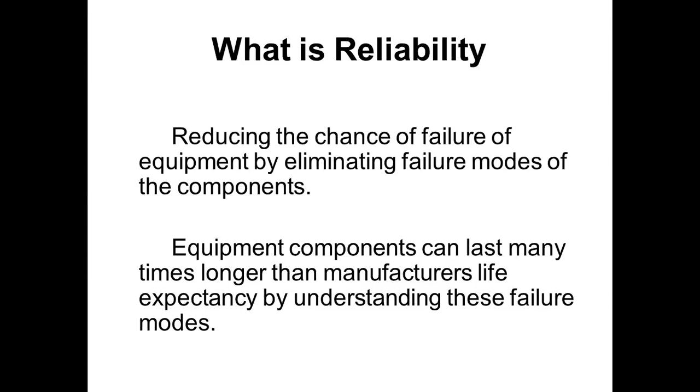So what's reliability? Reliability is reducing the chance of a failure of equipment by eliminating failure modes of the components. Now, a lot of times when I walk through plants and I see motors in a maintenance shop, or I see a gearbox there, and I ask why those components failed, they'll get answers like, well, it locked up, or the gear stripped out, or the bearings failed in the gearbox. But we have to know exactly what component failed in that piece of equipment to understand how the equipment actually failed, and then from that information, we can keep those components lasting longer and extend the life of those pieces of equipment. So why is reliability important?

If you're talking about reliability issues, whether you're a vendor, whether you're an operating plant, whether you're in operations, equipment reliability ensures that the equipment will last many more life cycles longer, and it reduces the cost of ownership and the life cycle cost of maintenance. We'll talk a little bit about life cycle cost as we go through this presentation, because it's important to understand the life cycle of your equipment and how, as reliability engineers or operations people, we need to extend that life cycle.

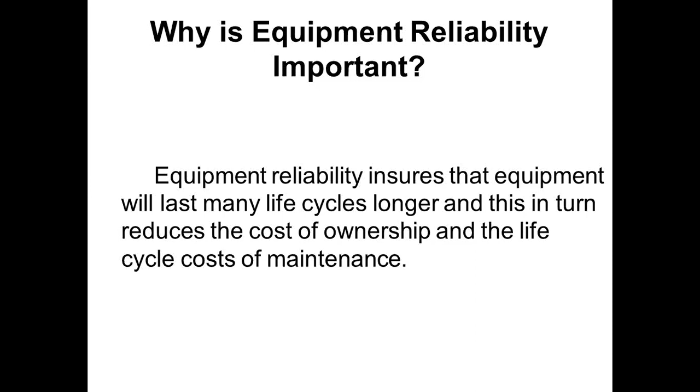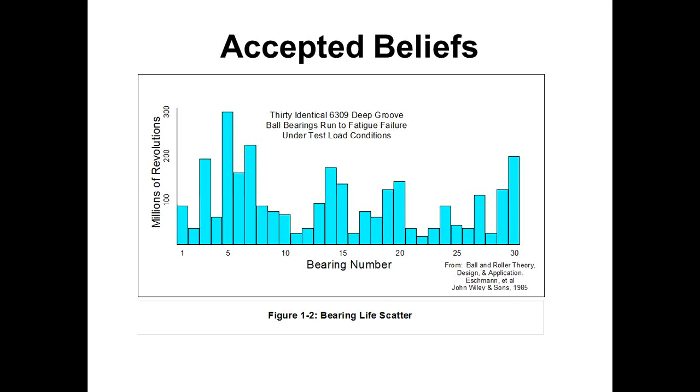Now, fortunately, there's a company in New Zealand that's redoing this study in modern days here, and they're going to do 90 bearings over 3 years, so we'll have some different data here in a few years. But if we accept this as an accepted practice, we're not going to have very good reliability at your plant. So it's important to understand that equipment and components can last and function many more life cycles. A lot of people believe - and I go into plants all the time where they change motors out based on mean time between failure, change out belts and bearings based on mean time between failure - because they assume that's all the longer it can last. But there's many things we can do to make those components last longer life cycles.

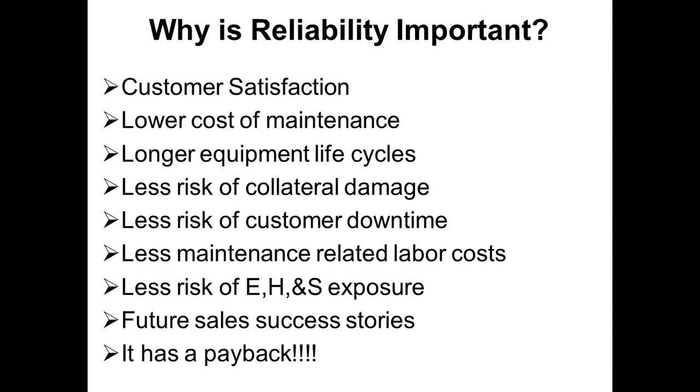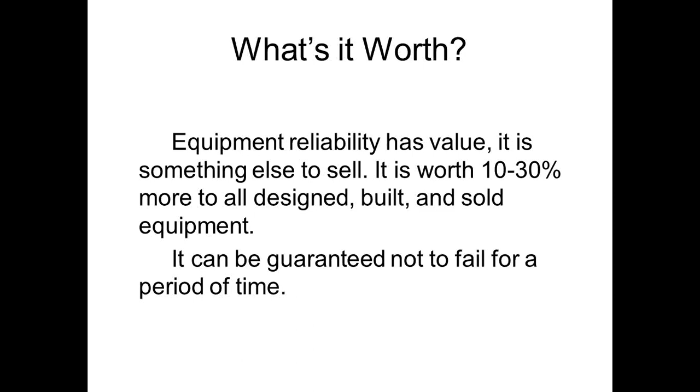So if you're a vendor telling your customers, or if you're an installer - and I did this kind of work for a few years where I'd go in and install pumps, fans, and rotating equipment for companies - I would guarantee no failures for 3 years. Now, how can you do that? We're going to look at some methods here in the next few slides where I can make those guarantees. I've never had to pay off one of my guarantees for the 3-year failures because we do things right up front.

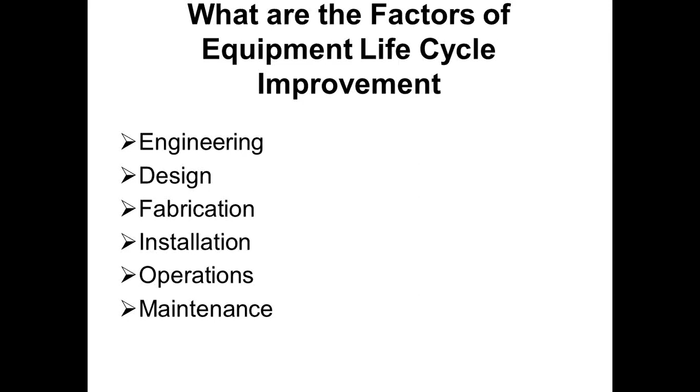So what are the factors that go into equipment life cycle improvement? We have engineering, the design step, fabrication, the installation step where we're putting our equipment in, then operations who operate the equipment, and maintenance who maintains the equipment. So what are the factors? These are all the factors that improve our equipment life cycles, but these are also all the factors that cause our equipment components to fail.

The reason their motors last longer is because the balance standard is much better on the rotor. They balance their rotors to 0.05 inches per second, where all your other motor manufacturers balance to an EASA or ANSI range of 0.08 to 0.12. But many of the motors I check out of the box in new equipment are much worse than that balance standard. I've checked brand new motors from Reliance out of the box that were 0.28 in balance. Well, those motors are only going to last about a year when that happens. But a lot of times we don't check new equipment for balance because we assume it's new.

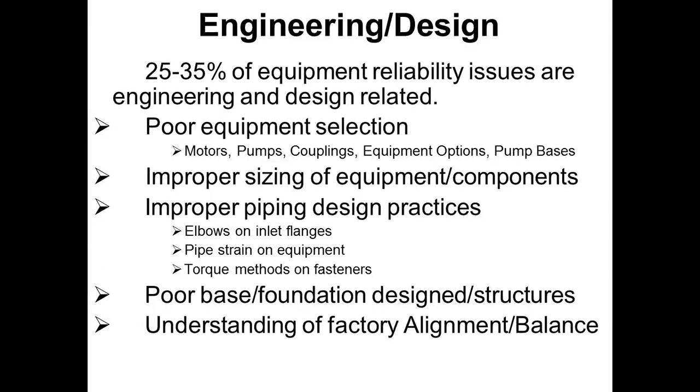Improper sizing of equipment components, improper design practices with pipe stressing, torque methods on fasteners not being proper, poor or improper base foundation - the structures we put our equipment on. Not understanding factory alignment - I was installing equipment for a company, and I asked about the alignment procedure after the equipment was installed, and they said, oh, we align all the equipment at the factory. Well, it's not aligned and balanced when you get it in the facility.

And then finding out who makes the best motor, who makes the best pump, who makes the cleanest lubricants we're going to put in our equipment, and all these other components. I just listed a few here for different industries - who makes the best of those? And then the question is, when you know who makes the best, do you put the best equipment on everything? And the answer is no. The answer is you put those best components, those best motors, pumps, and couplings on your equipment that has the highest criticality. And once you start correcting the issues with that equipment, your failures and your downtime are going to be reduced.

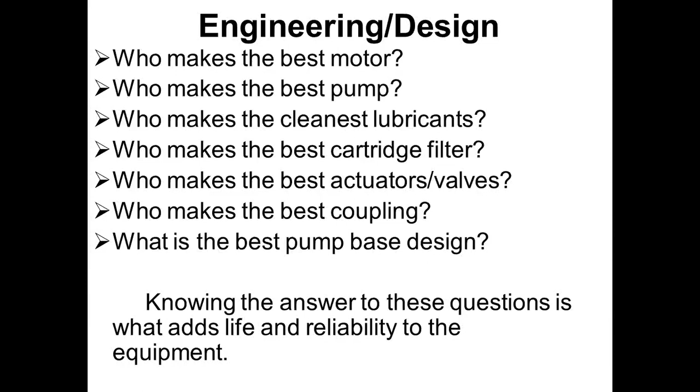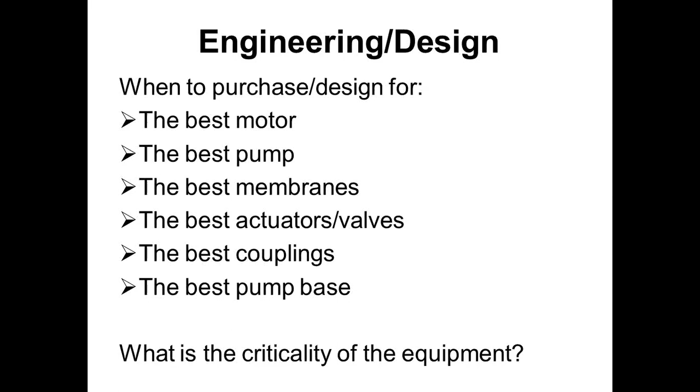So when do you purchase for the best motor? You purchase it for your high criticality equipment. And that's another webinar we'll do later on in the year, on equipment criticality.

Here's an example of equipment criticality. Take this 1972 Ford pickup, it's got these components: wipers, headlights, brakes, tires, seat belts, and a fuel pump. What's the most critical component on that Ford pickup truck?

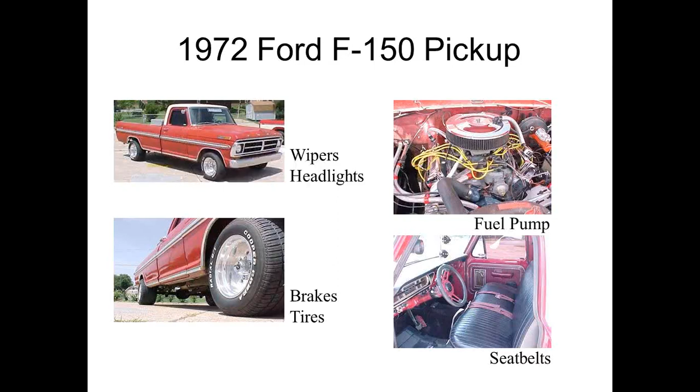You can go down through, and if I ask 10 different people, they'll give different answers. Somebody will say maybe the tires are the most critical component. Some say the fuel pump, because without it we can't operate. But if you're from a safety background, maybe you say it's the seat belt—we can't operate the truck if the seat belt's ineffective. We've got to have brakes.

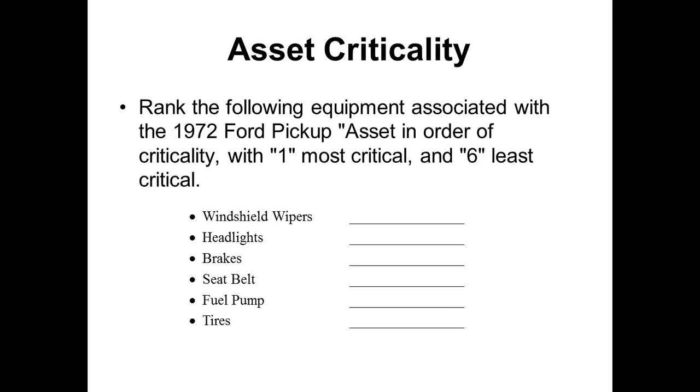But it's dependent on how you use the equipment as to which of these components is the most critical. If you're in an area where it never rains, like El Centro, California, where they say it rains one day a year, you may not need windshield wipers. If you never drive the truck at night, you may not need headlights. Again, it's dependent on the application, but it's about having a process to determine what components in your plant are the most critical. Once we find out, we put the best equipment on those critical components.

These are all the people that participate in an asset criticality assessment: your safety, environmental, commercial, operations, and maintenance people all have to have input into criticality. When you do criticality, it can't just be a maintenance team determining what equipment or equipment components are critical.

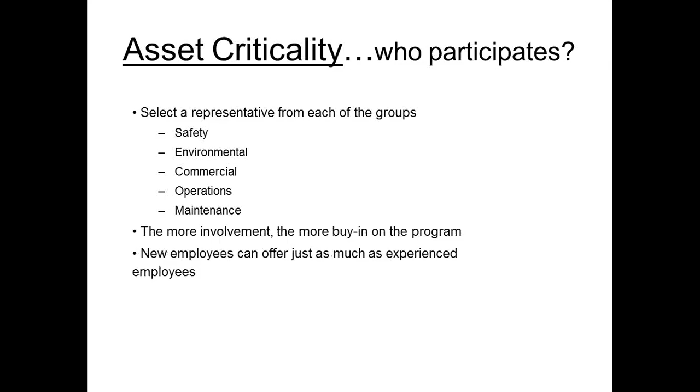Here's an example of my asset criticality database where you ask the questions. As you go along, you can see this overall score as we ask questions in areas of safety, environmental, sometimes food safety, quality, and operations. The database keeps track of where we're at on the scoring and gives us an overall total. From that total, we can determine what equipment in our plants is the most critical.

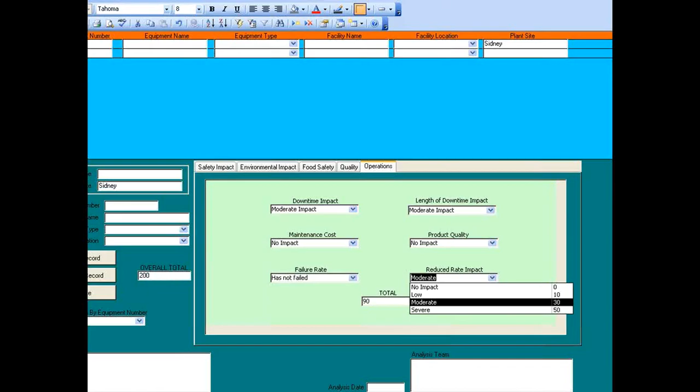Now, considerations for design. How do you design things? Do we want to make everything last for 30 years? Who's the customer? How critical is the customer? How critical is our operation? How much safety is involved? Are you maintaining the equipment yourself? So you start asking these questions.

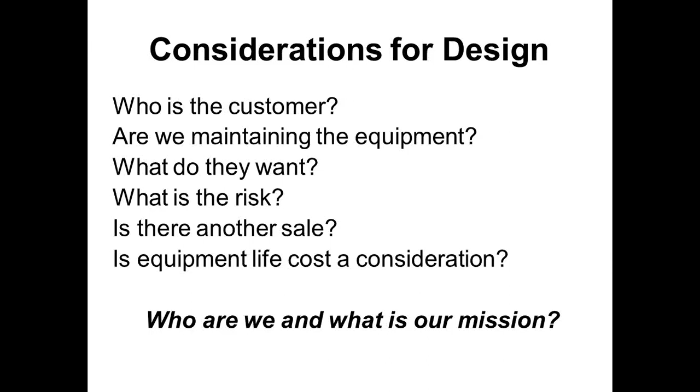How important is it to engineer and design for long life? Is equipment life cost a consideration? Is downtime a consideration? So a lot of factors go into this.

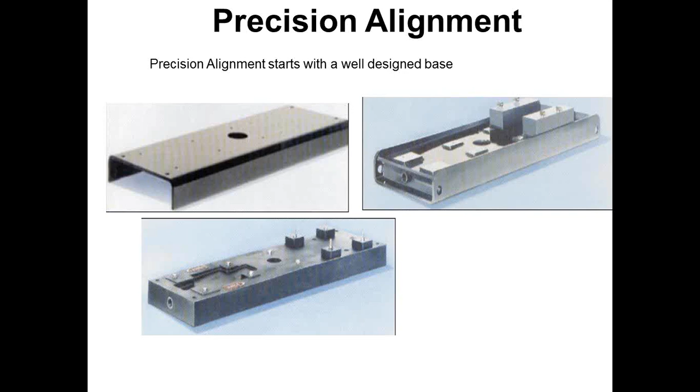Here's something people don't consider when buying a pump: what's the shaft deflection going to be if somebody slams the discharge valve shut? Here's a calculation called the L3D4, known by most pump manufacturers, but they never bring it up for one reason—they like to sell pumps and pump parts. Your L3D4 should never be over 50.

So here's an example from the pump we just looked at. From the impeller to the bearing is 7 inches—we take that to the third power. The shaft diameter is 1 7/8 inches. So we have an L3D4 ratio of 27.8, a well-designed pump.

Now, if we cut the shaft down to put a shaft sleeve on, cutting it to 1.5 inches for the shaft sleeve, our L3D4 goes to 68.6, and it's not a very reliable pump. That shaft's going to bend sometimes on startup, sometimes when people close discharge valves too quickly. So again, just a quick review of different things to look at in design and engineering.

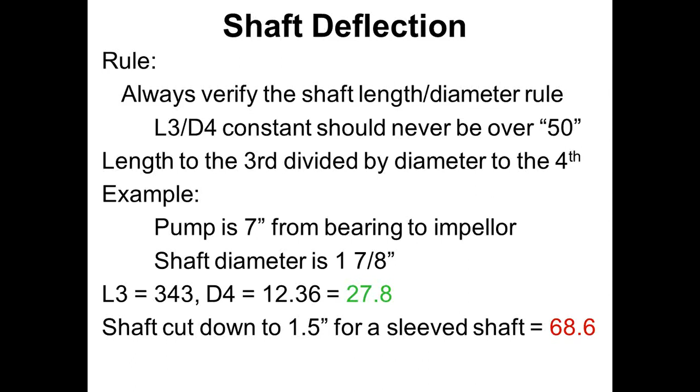So when do we want to use the best? We talked about that—look at your life cycle cost. If you're selling equipment, can you sell on life cycle cost? I put a couple of slides in here.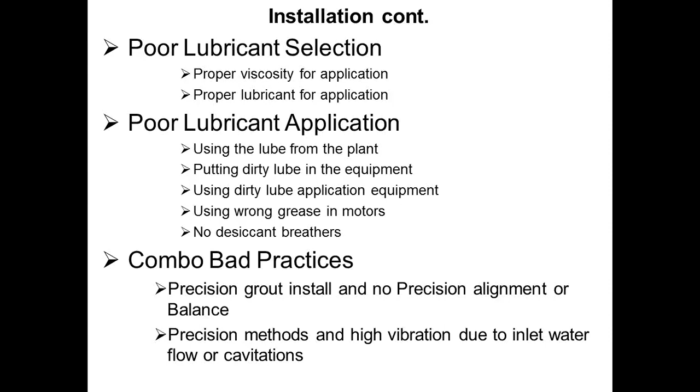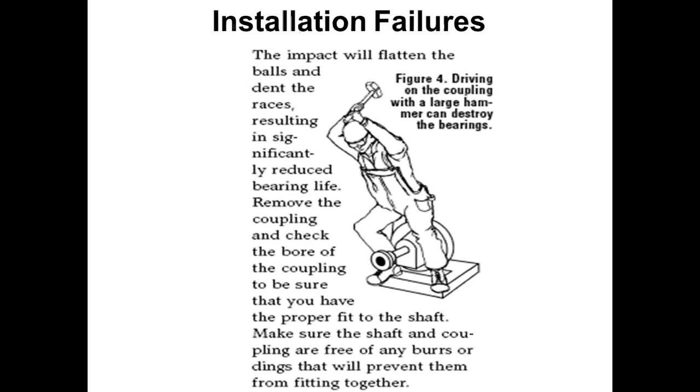So if you're going to use good structures like that, make sure you use precision alignment, make sure you purchase balanced components. And then how many of your failures come from your installation practices, from maintenance people putting couplings on, the way they install bearings, the way you store bearings? So a lot of installation failures.

Now we get down to the equipment here, and we've got operations that are operating the equipment. Well, if we don't operate it correctly, what kind of bad things can you do in operation? 10 to 20% of your failures from your equipment are from operations.

Starting equipment under a full load. If you close the discharge valve too quickly on a centrifugal pump, you can bend the shaft. Your maintenance people or your operations people are not trained to go out and touch the equipment and monitor thermal conditions and catch things at an early stage.

Your operations people are not trained to go out and touch the equipment to find out if you have physical vibration, and not monitoring your visual oil checks. I train operators in some Owens Corning plants to look at the oil and tell if the oil is oxidized, so you can report that back to maintenance. Sometimes we can tell if there's moisture in the oil just by a visual check.

Operating equipment in manual. Lack of fluid to the pump on startup and destroying seals. All things a lot of times that are happening from operations.

I put this one here, water on components. I went to a plant one morning that I was doing some work at, and the motor was kicking out the night before in the thermals, and so the operator thought it would be a good idea to put a water hose on the electric motor. Well, that's not a good practice, but again, they're not trained. It's probably been a common practice at that plant.

Lack of a TPM program. Total productive maintenance is where we get operators involved in not just the maintenance of our equipment, but doing proper inspections. One of the things I'm doing with Owens Corning right now is we're doing operator training on equipment failure mode, so the operators can recognize different things that happen on their equipment that cause it to fail.

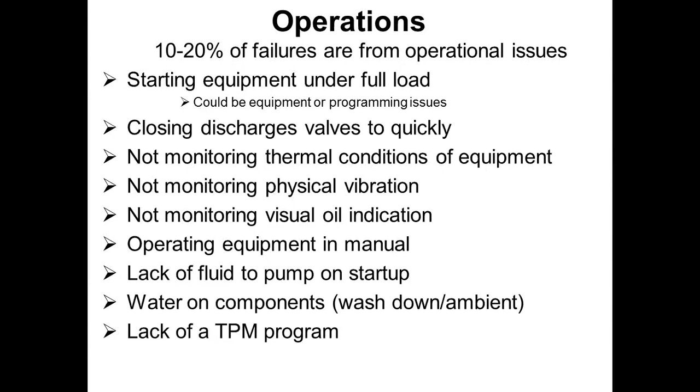An example of that: if you have a motor and the fan guard's all blocked off on the back of the motor and it's not getting air across the motor, this can shorten the life of that motor by 3 to 4 times. So the operator now cleans the back of the fan guard so we get good airflow.

Now we get down to maintenance. So we've got all these inherent failures, all these things that happen before maintenance ever gets control of the equipment. Maintenance only has 20 to 30% responsibility for all failures directly contributed to maintenance. But here's how maintenance can fail.

Improper inspection of components, not being trained. Improper lubrication practices. How many of your maintenance people have actually been trained in lubrication to filter the lubes before they put them in, not to put too much lube in there and create extra heat? Not doing lube analysis, not even knowing how to visually look at the oil and tell if we have a problem.

And then you've got no or poor preventive maintenance programs. I find this at about 80% of the plants I go to, where you have maintenance procedures or PM procedures that say check the pump, check the motor. Well, what does that mean?

So we have to define the preventive maintenance tasks to be non-subjective. They have to be tasks that tell them what to do. I go to plants all the time where there's no predictive maintenance program, not using tools. There's a lot of good, reasonably priced tools out there we can use to do predictive maintenance and tell if things are failing long before we can tell physically with our physical senses.

Oil analysis and mechanical ultrasound are nice, cheap, predictive technologies we can use to find out if equipment's failing at an early stage. No or poor proactive maintenance processes. We looked at all those processes in our system, on our PF curve. Lubrication excellence, precision alignment, precision balance - all these things are proactive tools we use to make our equipment last longer.

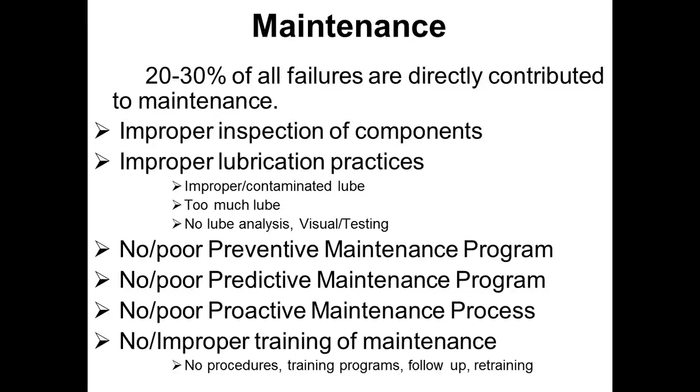And then follow up on those programs and retraining. The training process at a plant, especially for maintenance, never ends. There's all kinds of good training programs, and if you're interested in some of those, let me know.

So those results I showed you, my percentages were done from a study I did with a water company and some things we did at Cargill. But look at this - this comes from the Hartford Steam Boiler Insurance Company. It says almost 50% of work orders are preventable. Engineering and design are responsible for 42%, operations 26%, maintenance 28% are responsible for failures of equipment. Now, they've only got 4% here for management, but management's responsible for everything that goes on in the plant, so that number should be much higher if we're not doing our other things like training, developing operators and procedures. You can see the numbers here are real high.

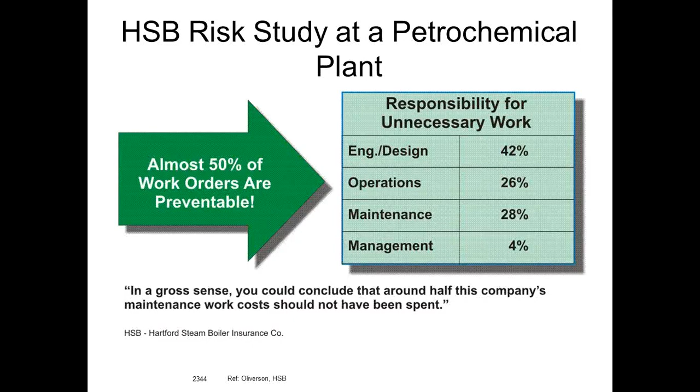Now, why would an insurance company do this study? Well, insurance companies are tired of paying for failures in our plant - fires, explosions, and major equipment failures. So they're looking into more of these studies of what can we do, because insurance companies are going to stop paying for some of the failures at plants over the years. That's why your deductibles are going up, and insurance companies are monitoring this very closely.

So you can see there's many reasons why our equipment fails, even before we start the equipment the first time. On critical equipment and operations, we need to make sure we design the equipment correctly and order reliable components. So let's say we have a process in your plant, we're going to put a new process or piece of equipment in. We go to the vendor, he gives you a price for that equipment, and then the management style is to go back to the vendor and try to reduce that price.

Well, when you reduce that price, you're going to get cheaper components. So if you're buying equipment that has a Baldor motor on there, and if this is a critical operation or critical part of that machine, and you put a Toshiba motor on there instead, that Toshiba motor, more than likely installed correctly, is going to last 3 to 8 times longer than the Baldor motor. So again, it's making those decisions. Sometimes the cost of your new equipment is going to be higher, but remember our slides on the life cycle - it's going to last longer, and the cost of maintenance is going to be less. So the initial purchase price is going to be the lowest part of that pie.

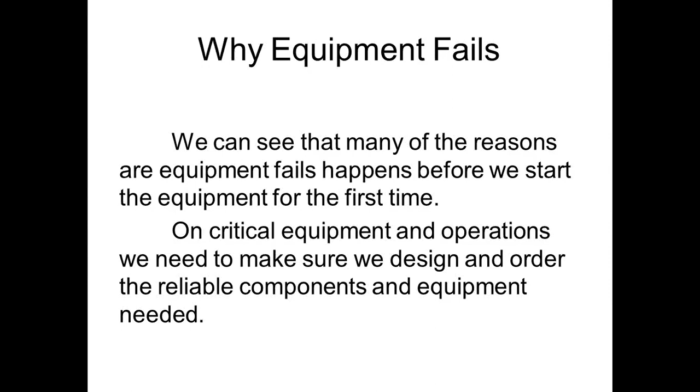Now, after your equipment's installed, are we performing the correct PMs? Sometimes at plants I go to, we start the equipment up, we run it, something fails, and we develop a PM around that failure - a new PM. If you're using the OEM's suggested PMs, about 30% of those are ineffective. They don't actually help the equipment component last longer, and they don't help you find failures.

So you need to look at all your PMs. Ask, how were the PMs developed? Were they from past failures? Were they from OEM-directed instructions? Are you doing PMs that should be PDMs?

Here's a question I'll ask, and I find this at many plants when I'm doing maintenance audits - are the PMs actually getting completed? Now, a lot of times we put out work orders. I go to even major companies where they'll still put a stack of PMs on the maintenance table at the beginning of the week and beginning of the month, saying, guys, get these done.

Well, if they're not ranked by criticality, do they get them all done? Are they just pencil whipping some of them and turning them in? Is there a way for you to find out if they get them done? And are they PMs that need to be done?

So if we put critical numbers on the PMs to make sure the ones on the critical equipment are always completed, you're going to see some reduced failures. I've got some data from another company I work with that shows as the percent of PMs completed increased, the percent of reactive maintenance decreased, and they're just continually working on that. So they've decreased their reactive maintenance by 27%. They've increased their PMs that are actually getting completed by 38%. The model's actually working.

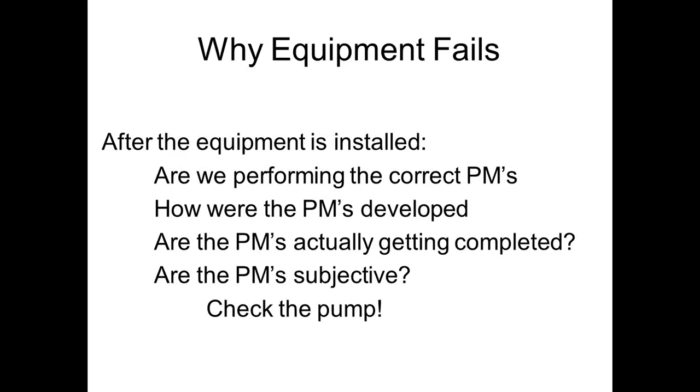Here was a PM. This component at a plant was checked off on the schedule as being completed the day before. So when I took the operations and maintenance people down there and they said they completed the PM on this motor, what should we have done? What should the PM have actually said? Because if you look at this motor with the covering of dirt and dust on it, the temperature of the front bearing - when we cleaned the fan guard and cleaned the motor, the temperature on the front bearing went down 35 degrees.

Now the failure rate of motor insulation is such that for every 18-degree rise in the temperature of that motor, it cuts the insulation life in half on the windings of that motor. So by lowering this 35 degrees, we almost got 2 times - well, almost 4 times - the life out of that motor. And a simple PM task is every day, every week, we clean this fan guard off and we clean the motor off.

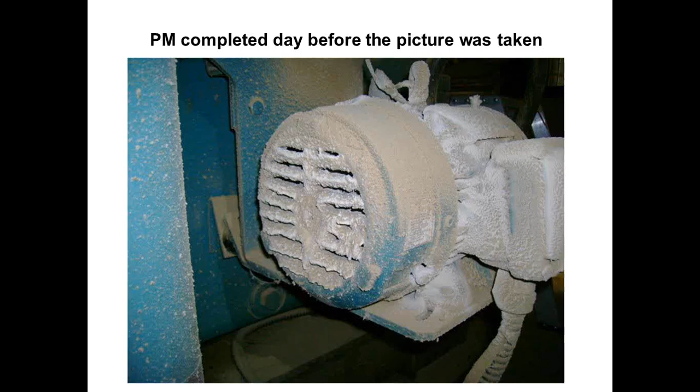So if we talk about training again, has your reliability and maintenance people been trained? Do they understand lubrication excellence? Do they understand cost effective predictive maintenance? Here's one - if we're talking about oil analysis, so many times I go into plants, they're doing oil analysis, but they haven't been trained on what the ISO cleanliness code is, what that 3-digit code actually means, and which of the numbers we should actually be working to reduce.

They haven't been trained on reading their vibration analysis results. I was at a company where the vibration analysis company was a motor company. 80% of the recommendations was replace or rebuild the motor, but about 80% of the issues were balance issues with the fan or the motor - they weren't issues about rebuild or replace. So I switched them to a normal balancing company, taught them how to read the results, and now they're actually making headway training people in precision maintenance.

What is precision maintenance and are we using it? Using the RCM method - reliability centered maintenance - where we look at how components fail and we develop ways to predict, prevent, or eliminate those failures. PM optimization - this is a process, I can send you a PM optimization Word doc where you ask your own questions, but you look at the PMs you're currently doing to find out if they're adding any value. Failure modes effect analysis - if any of you need a FMEA spreadsheet where you can ask the questions and it calculates the number, I'll send you that spreadsheet for all the things you need to be doing.

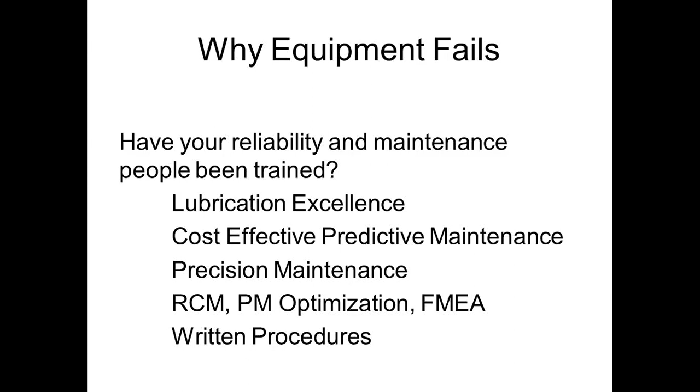Developing written procedures - me and my son are actually working at 2 plants right now. We're developing written PMs with pictures and arrows, actually explaining what the task should be. Now why are they doing that? They're doing that because every maintenance person at that plant has over 35 years of experience, and they're going to be retiring in the next 3 to 5 years. So these new people coming in are not going to know how to do those PMs. So the older maintenance people there are helping us write effective PMs so that they don't lose anything when these guys leave.

Operations with very few failures. The airline industry has a failure rate in the U.S. of 0.00035. The nuclear power industry, how many failures do you hear about? Very few. The military too. There's a lot of other high-risk operations in the country, but why do they have so few failures?

Two reasons. They have good training programs, they have excellent procedures, and they actually follow those procedures. And by doing that, they have very few failures. And all these industries here also use RCM.

The basics of RCM is you ask the question, how can it fail, or how has the component failed? Then we ask, is there a predictive technology to predict the failure? Is there a PM task to prevent the failure? And is there a way to eliminate the failure by a redesign? Can we put a better component there and eliminate the failure completely? This is why these industries have very few to zero failures.

Can we do the same thing in the industries we're in, the plants we're in? Yes, we can. We're probably not going to get to 0.00035, but what if we got all of our reactive maintenance down below 10%? How much more effective would your plant be? How much more rate would they run? Well, I have a plant in Chicago that we started 6 years ago doing these processes.

Their OEE at that plant has moved from 52 to 92.3, and now they're trying to get to 96.3. What does that mean for their operation? Well, they actually produce 4.5 million units. I can't tell you what the units are because it'll give the customer away, but 4.5 million more units per month of the products they make than they were making 6 years ago. They haven't added a single person, haven't added any new equipment, 4.5 million units per month.

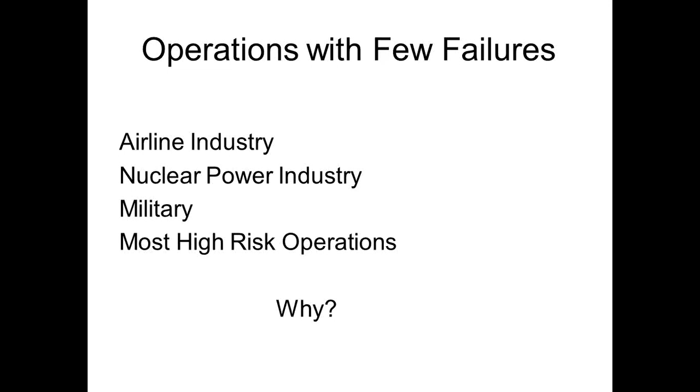An example of that, I'll give you one quick example here, an Alfa Laval centrifuge. We used to change the oil in our Alfa Laval centrifuge every 30 days because the OEM said we should. When should we change the oil in the Alfa Laval centrifuge? When the oil analysis tells us to change it. So once we started doing oil analysis, we changed the oil in the Alfa Laval centrifuge every 3 to 4 months.

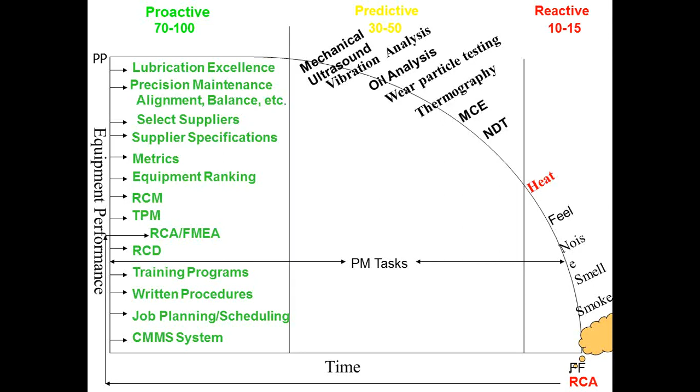So your PM task changed. It changed from a PM task to a predictive technology telling us how to do that PM, or when to do that PM. So again, what does it mean? The future, it's going to be dollars, right? We're all in competition around the world. We're all trying to do things to make our plants more effective. We're all trying to save dollars, and if we don't do that, you're not going to be competitive in the industry.